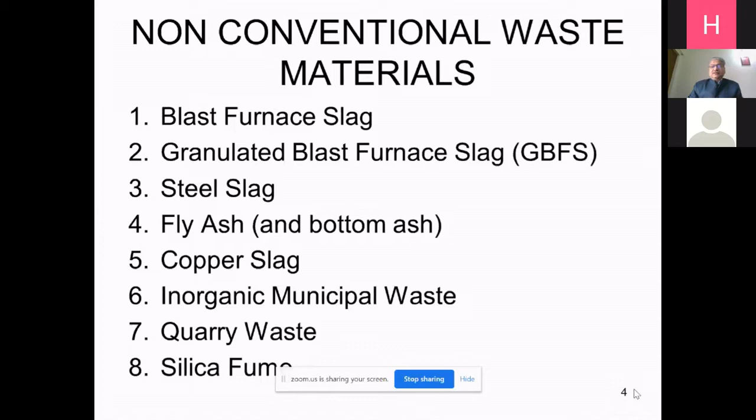Then you have the quarry waste. Quarry waste is the material which, when you blast any quarry, settles in the nearby areas and that can be used in road construction. Silica fume is the material coming out from the glass making industry, and these are basically the silicates.

Then you have the colliery spoil. This is from the coal mines. Red mud - anybody can guess from where red mud is coming? Anybody among the participants can guess? Nobody? Okay, so red mud is coming out from the aluminum industry. When you are making aluminum, the bauxite ore is converted to aluminum, and the waste material comes out. Then bagasse is the waste material.

Again, anybody can guess? I hope your mics are off, so that is why somebody is speaking, he is not able to answer. So if you want to answer, first unmute your mic and then answer.

Anybody has answer to bagasse? Waste material from sugarcane industry. Yeah, it is from sugarcane industry, right answer. So when we take out the juice extract from the sugarcane, the remaining part is burned as the burning material in the boilers, and after that, whatever comes out is basically the ash, which has the property just like fly ash, so it can be used there.

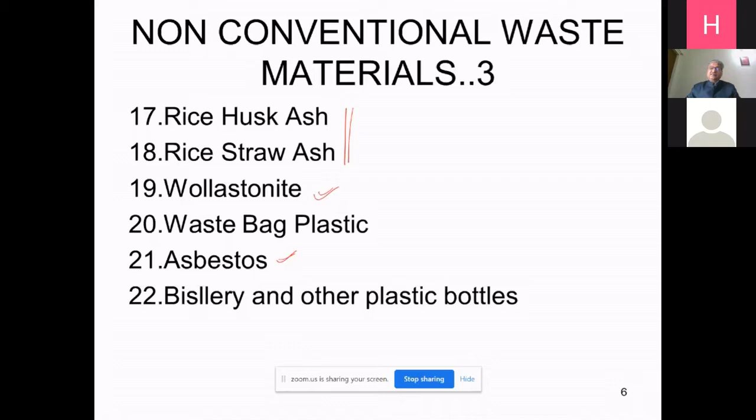Then we have waste bag plastic. With this waste bag plastic, you mix it with the bitumen and modify the bitumen, or sometimes it can be used as reinforcement as the geotextile in the pavement also. Then asbestos is also a material which, after use, becomes useless, and then it can be mixed with bitumen. Similarly, different types of plastic materials like Bisleri bottles or any waste plastic bottles can be used to modify the bitumen.

This is a dump near Rourkela steel plant. Its height can be assessed from the figure. You see here, there is one buffalo standing here, and by the height of the buffalo, you can understand the height of this dump, and how difficult it is to utilize this waste material.

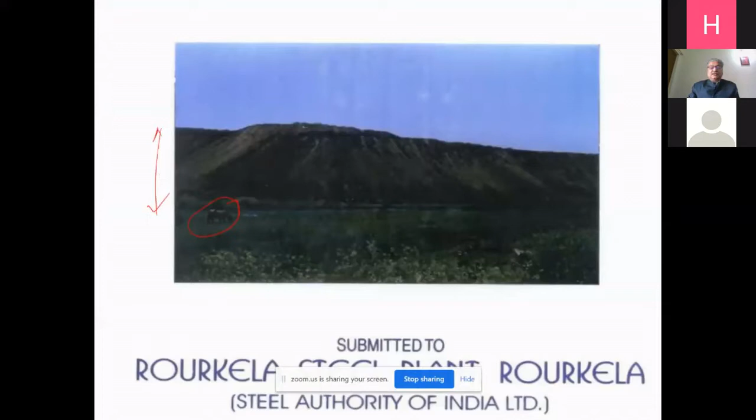Now you can see that there are three waste materials which are coming in the picture. First is the blast furnace slag, air-cooled blast furnace slag. Second is the granulated water-cooled blast furnace slag, and third is the fly ash.

So first I will tell you about the blast furnace slag. It depends upon what method you are using to cool the slag. When slag comes out from the steel plant, its temperature is more than 1000 degrees centigrade, so if you put it in the air, it takes the shape of big rocks.

To cool the rock, there are different methods. First is to let it be in the air as such. So it will take the form of big rocks and boulders that can be crushed, and in that case it will be the blast furnace slag or air-cooled blast furnace slag.

If you put the jet of water over that to cool it, then it will take the structure of small tiny particles like sand, and then it will work as the fine aggregate.

If you put the jet of air over it, then what will happen? It will take the form of expanded slag. Expanded slag is nothing but aggregate which is having very light weight, and due to light weight, it can be used in the filling where the load requirement is not there.

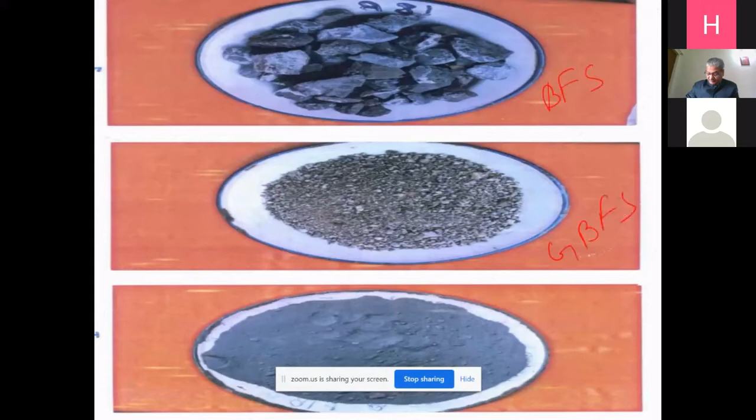Now, after the iron comes out from the blast furnace, it is further refined in the steel making shop. There also waste material comes out, and that is having more strength. This waste material is having more steel. So this is very dense, hard material having lower alumina and silica but high lime.

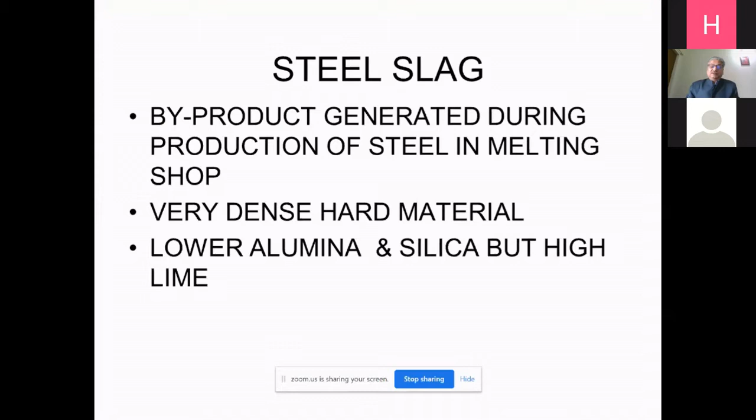Because if you want to use any material in road construction, what you have to do? If a new material comes to you and somebody says you want to use it, what will you do? You will put it on the anvil. You will put it through the test, the traditional tests, and see whether these values are coming within the limits or not.

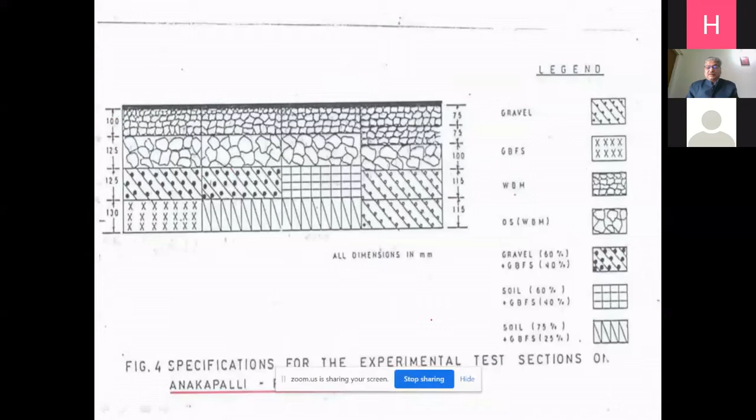You can see that one road was made near Visakhapatnam, the Anakapalli Pudimadaka road. In that road we used 4 specifications. It was basically 1.25 meter widening on both sides, and then putting a new layer of bituminous construction on top.

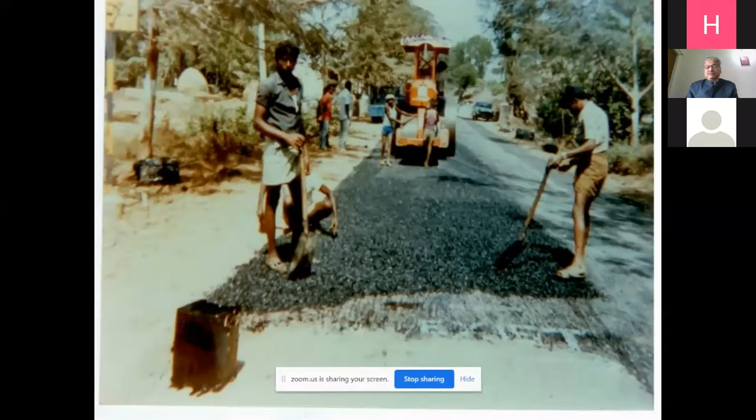After that, we were doing the evaluation of the pavement top surface. At that time more equipment were not available for pavement evaluation, so we used the dumpy level. This is a very old photograph, you may not recognize my photograph. That dumpy level was the only equipment available with us. This is on the Anakapalli Pudimadaka road.

The third work was at Rourkela, the Bandamunda Jalaigala road. In that we used 11 different specifications with steel making slag. You will find that in some specifications there is a full road with the waste material. This is known as the grave laitier technique, a French technique, where every layer is composed of waste material - that's what we were using.

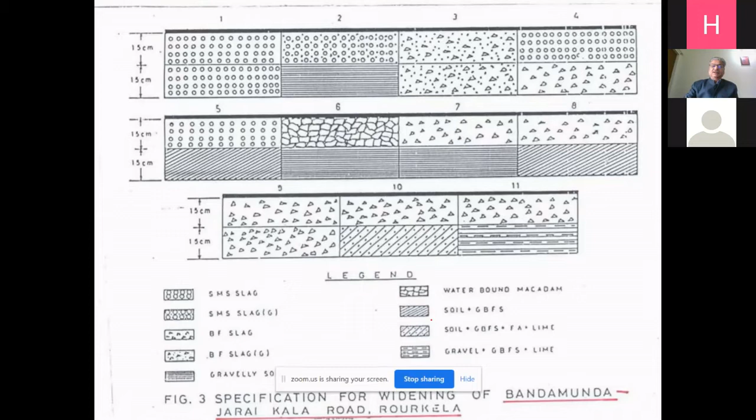Specification number 6 is the conventional specification, so that we can compare this. This road was also monitored for 3 years.

In this photograph you can see I am trying to find out the structural adequacy of the pavement using the Benkelman beam. In the second photograph you will find a dipstick, that is an auto-read road profiler. That equipment had come by the time we started this third project, and instead of the dumpy level, we used this equipment.

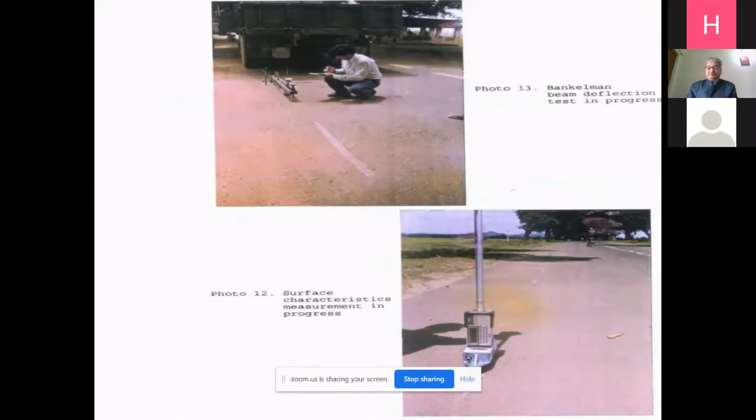You can see a mini computer fitted here, and at the road itself you can find out the rut depth, slope variance, etc. This photograph shows the texture of the road - you can see it is very rough texture, because steel making slag is used in the top layer, which was not crushed even after application of the road roller, because it had a good amount of iron with it. If you remember the table, SMS was having a good amount of...

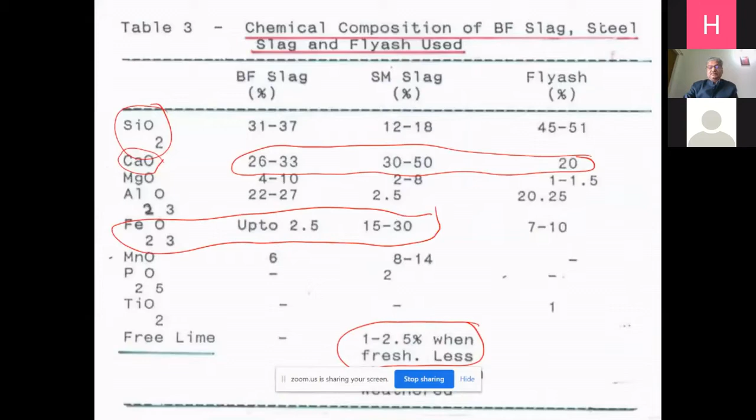We'll see here that Fe2O3, ferric oxide, is 15 to 30% in SMS. So this is the problem, or rather the point also - it is having 15 to 30% iron, and that is why this texture is very rough. The stones are protruding out, coming out, and that is why it was a very strong section.

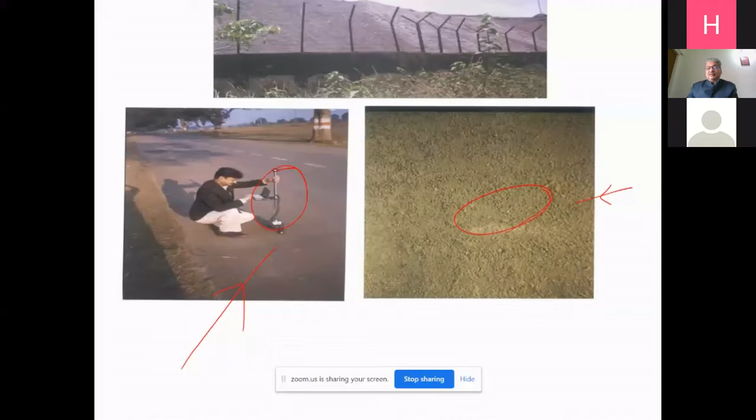The next is fly ash utilization in road embankments. At that time, the parallel bridge of Nizamuddin Bridge, the second bay, was being constructed on the Yamuna River, and at that time it was known as the Indo-Japan Friendship Bridge. For the first time in the country, the embankment was constructed using fly ash - 10,000 trucks of fly ash were utilized in this construction.

As I said, there are many problems with fly ash. That is why research was going on for the last 30 years in the country, but no road was being constructed using fly ash. Why? People used to say that if you put the pages of the research papers written on fly ash one by one on the road, the road length that comes out from those pages is more than the real road construction using fly ash, because it was being done in the lab, but not in the field.

Fly ash has its own problems - it is always put in moist condition, otherwise it flies. Its name is fly ash, so that is why it flies. If it has more water, it flows like water.

So it cannot be transported in air, it cannot be stored without water. Considering this problem, mixing of the fly ash is also difficult. The OMC of fly ash is more than 25%, while the OMC of other soils is around 8 to 12%. So it requires more water, and when it has water you cannot mix it. For mixing, you have to dry it, and if you dry it, it will fly. Considering this problem, nobody was able to put his hand or leg in this controversy - everybody was just writing papers and nobody was making the roads. At that time there was pressure from the Environment Ministry to utilize this material, otherwise it was causing a lot of environmental hazard.

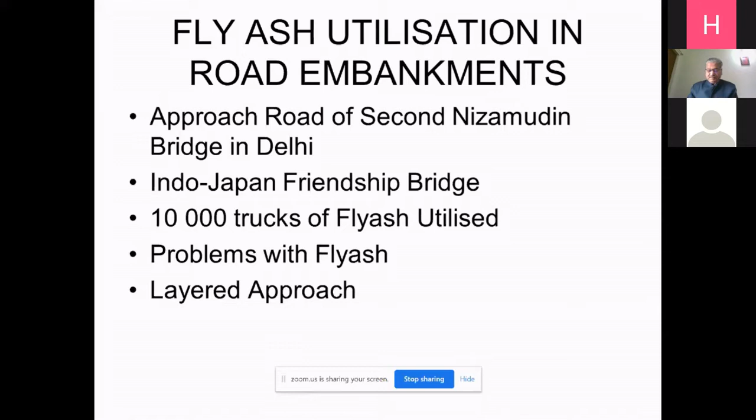1 meter of fly ash, then 30 centimeters of soil, repeated in layers. That way a 9 meter embankment was constructed, and pitching was done from the side. You can see here - this is soil, this is fly ash, and this is stone pitching. From the side, a 1 meter soil cover was provided, and after the 1 meter soil cover, stone pitching was made there.

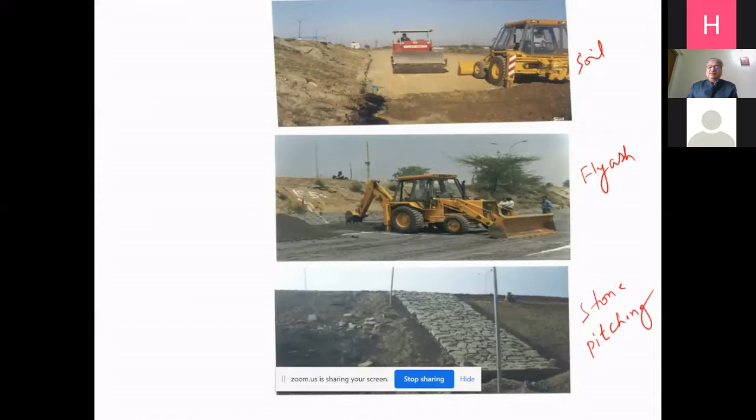Now another thing you can see here - these are plastic boards. This is the project which I did with BPCL, Bharat Petroleum Corporation Limited. This is a photograph from the Bombay refinery of BPCL, on their campus. What they are doing is making plastic boards from waste plastic like this - they compress the plastic and put it in the form of a board. These boards are placed there, and over that we provided 50 millimeters of bituminous concrete. You can see the material was filled up in these boxes. The main purpose was to utilize the plastic.

You can see here the road which was made using this material. Then we tried to find out the structural adequacy using the Benkelman beam. This is a modified form of the Benkelman beam - earlier we were using the open type. This is a simple, in-house type of Benkelman beam in which you can take readings. This project was done around 3 years back, before I went to NIT Delhi as director, and still it is working. Recently, one road has been constructed in Noida using the same technique, and we are going to monitor that road periodically. If it is successful, we will be able to use this technique throughout the country.

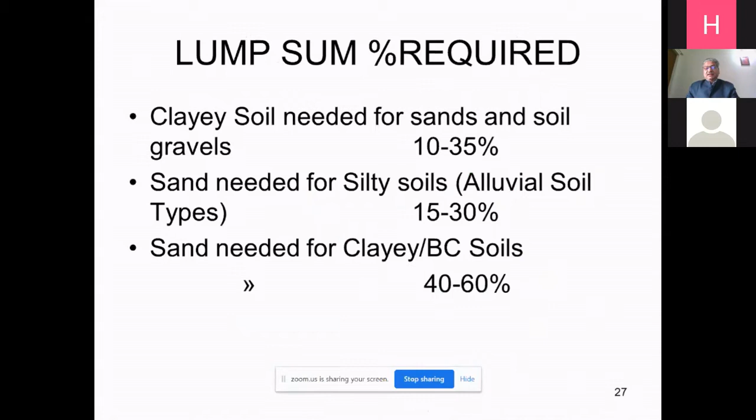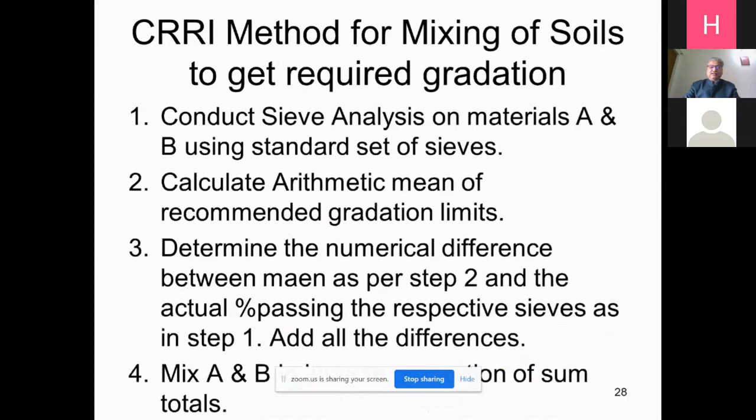Now there is another method for mixing of soil to get the desired gradation, which we have discussed here. The same method we have discussed, for example.

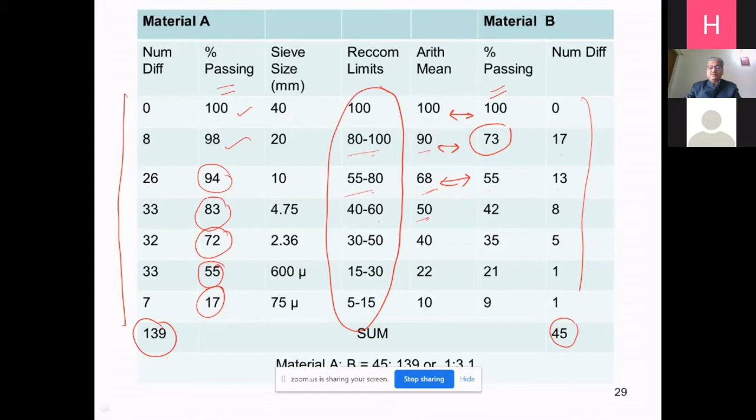Material A and B, these values are with you now. After that, you have to add these materials, and material A and B will be in the reverse ratio of this. A is 139, B is 45. So material A and B are in ratio 45 is to 139, that is 1.3 is to 1, or 1 is to 3.1.

Another method is the Rothfutch method. The Rothfutch method is a worldwide used method, and people use it for any type of material. For example, the CRRI method was only for two materials, while the Rothfutch method can be used for any number of materials.

And Rothfutch was a very creative type of person. What he did was manipulate the x-axis to find out the curve.

Normally, what you do—if you remember, try to recall your memory for class 12th—you were asked to plot a curve between voltage and current. It should come like this, but normally it was not coming.

What did you do? First you draw the curve, and very smartly you put the curve which you are getting. The teacher gave you full marks for that, saying you got a good curve, but actually you hadn't. You manipulated the points. If I am not wrong, everybody has done like this, and the teacher was also knowing this because he also did the same thing when he was in your place.

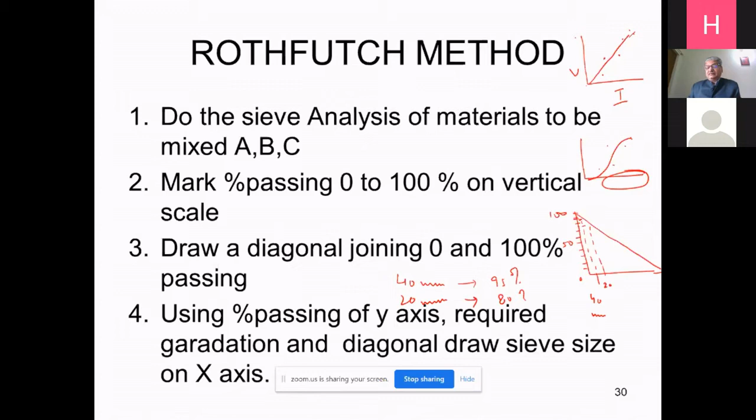Without putting the values on the x-axis earlier, you drew the curve first, and corresponding to the curve and percentage passing of the recommended limits, you are now plotting the x-axis. This is the crux of the method.

You can see here, this is the curve which we have drawn, and these are the values which we have got from there. After that, draw the particle size distribution curve of materials A, B, and C. This is material A, so first you join the points.

After making this joining of the points, what you have to do is you have to draw a straight line representing this curve on the principle of equal and minimum material on both the sides. For example, I could make this line also. Suppose this is A, this is B. Can you tell me which is a better representation, line A or B? Somebody can unmute his mic and tell me which line is the better representation of the curve, line A or line B?

Line A, sir. Why? You are correct, your answer is correct. But can you answer why A is better? Because more or less, it is following the same direction.

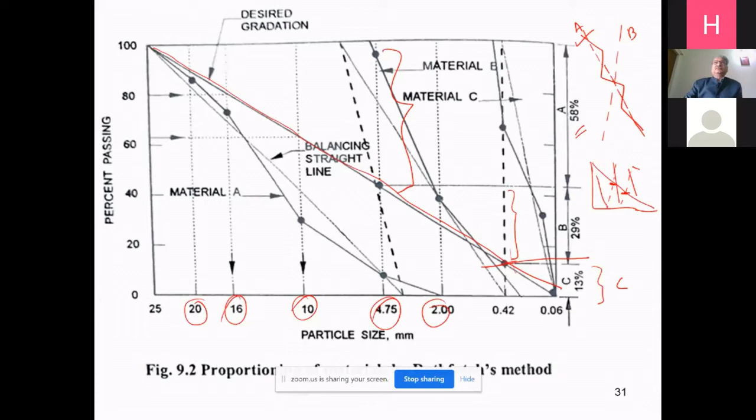This is about this one. Another method is the triangular chart method. Triangular chart method is again for 3 materials only, and in that, for every material you have to find out what is the proportion of coarse aggregate, sand, and silt and clay. So coarse aggregate means 3 centimeter to 2 mm, sand means 2 mm to 0.06 mm, and clay is less than 0.06 mm, on one side each with 0 to 100%.

You will see the figure. This is the coarse aggregate, this is percent sand, and bottom is the clay and silt. So you can see here that A part is marked here. A is basically 85% sand, 5% clay... wait, 85% coarse aggregate, 5% clay, and 10% sand.

Total should be 100%. The key is to be seen for this. This is A. This will tell you about the percent of coarse aggregate, this will tell about sand, and this will tell about clay and silt. So A is showing here like this. This is your coarse aggregate, this part is showing you the sand, and this part is showing you the clay and silt.

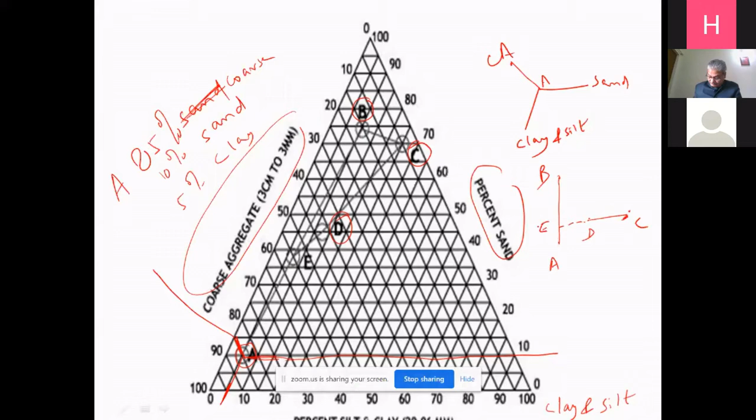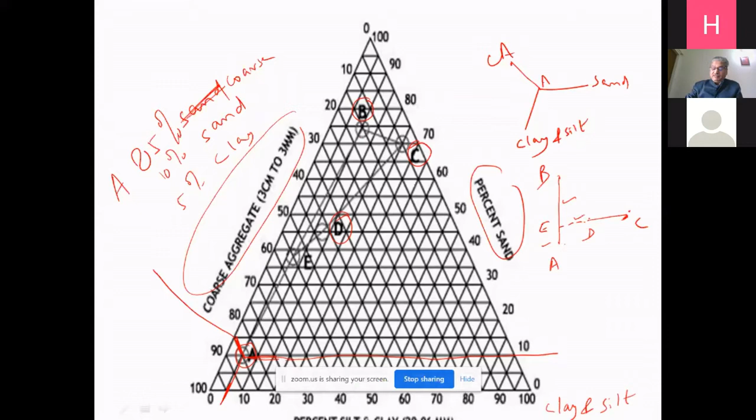Extend this line to join AB at E. Join A and B, join C with the desired gradation D. Extend the line CD to join the line AB at E. Then measure these values EB, EC, CD, and DE. Based on that, you find out the material proportions. Percent of A is equal to EB into DC upon AB into EC, into 100. Percent of B is EA into DC upon AB into EC. And percent of C is ED upon EC. So this is the method.

Now, many times this question is asked - in every method, we are saying the desired gradation.

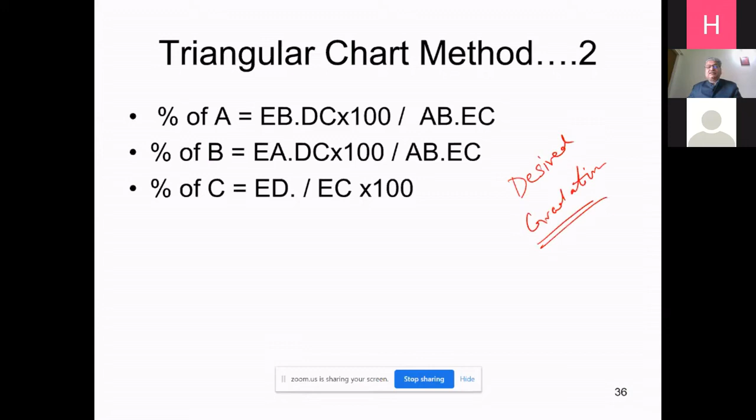From where is this desired gradation coming? For that, Fuller's method is there. It says P, the desired gradation, is equal to 100 into D by Capital D to the power N, where P is the percent finer than diameter D in the mix, Capital D is the diameter of the largest particle in mm, and N is the gradation index.

Let us take one example where we have a material in which the maximum size is 40. So this becomes our Capital D. I want to know what material passing 20 mm should be there, and N may be taken as 0.5. So P equals 100 times 20 upon 40 to the power 0.5, that is 100 into 1 by 2, so this comes out to be 71%.

Similarly, if I do for 10 mm, then 100 into 10 by 40 to the power 0.5 comes out to be 50%. So this is the method to find out the gradations of all types of mixes prevailing in the country or the world. Rothfutch method is also based on the desired gradation, which is taken from the Fuller's method. This question may be in your minds, in your books, codes etc. Everybody writes that this is the desired gradation, then anybody can ask who gives you the desired gradation. So the desired gradation comes from here.

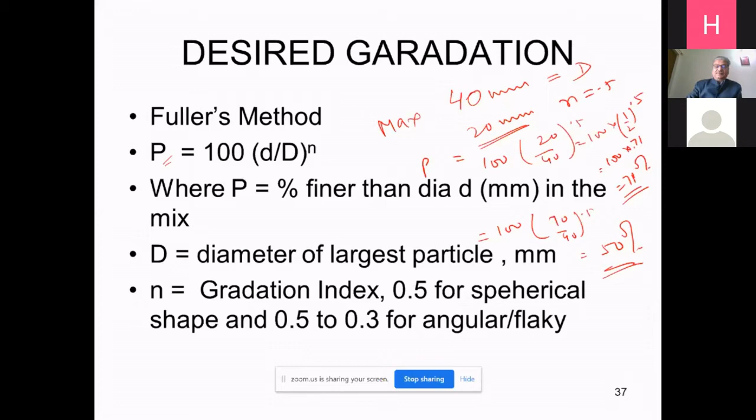Now, stabilization using soft aggregates. Many times you will find materials which are very soft and cannot be used as such. But since these are available and you want to use them, you have to understand the scenario of using the aggregates. For example, there is the condition of coarse compacted aggregates with no fines, compacted aggregates with fines just filling the voids, and third, aggregates with excess fines in which the aggregates are floating in the soil. Depending upon the condition, normally for rural roads or where load is less, you can go for this, avoiding direct loading on the aggregate by putting them in excessive soils.

With no fines, it is highly permeable. When fines just fill the voids, it is less permeable. When excessive fines are there, it is poorly permeable. Permeability is there when you have sand or coarse aggregate. When there is clay, the permeability is less, and the drainage is also less.

But when there are no fines, the cohesion is very less. It is difficult to put the material when it is not confined, because the material will come out from the sides. For example, if you put sand in the shoulders, since there is no confinement and no cohesion, the sand of the shoulders will come out, it will go towards the pavement edge, and your shoulders will be disturbed. But when there is clay in the shoulder, it will remain there. At the same time, when clay is too much, swelling will occur and the strength will be less. So you have to see the combination of different things so that your material passes through that.

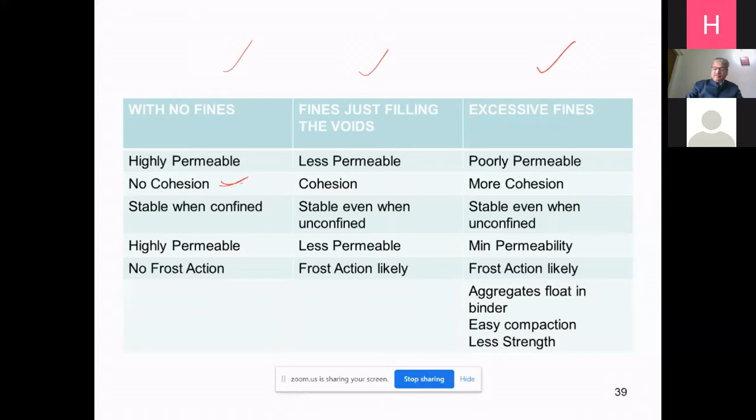Now, depending upon these three material conditions, we are interested because these two conditions are already understood, you know how to make the road. But when excessive fines are there, this is a method different from the others. For that, Mehra's method of construction using soft aggregate is there.

S.R. Mehra was the first Indian director of CRRI. He was the professor at IIT Roorkee, which was at that time University of Roorkee, or maybe College of Engineering Roorkee. S.R. Mehra was the first Indian director — of course I say Indian director because the first director of CRRI was Mr. Zipkes, who was British. Then in 1950, when an Indian director was there, it was Mr. S.R. Mehra.

So in this method, what they say is you have to use, in the base course, soil with 50% soil of PI 5 to 7, because this 5 to 7 means it is having clayiness also. Over that, you have to put the wearing course of brick and soil ratio 1:2, and its PI should be 8 to 10. So first the layer of base course is soil, then brick plus soil.

Soil is collected from approved borrow pits and stacked on the roadside. Water is added up to OMC and the soil is mixed and spread to the desired camber and rolled by an 8-ton power roller.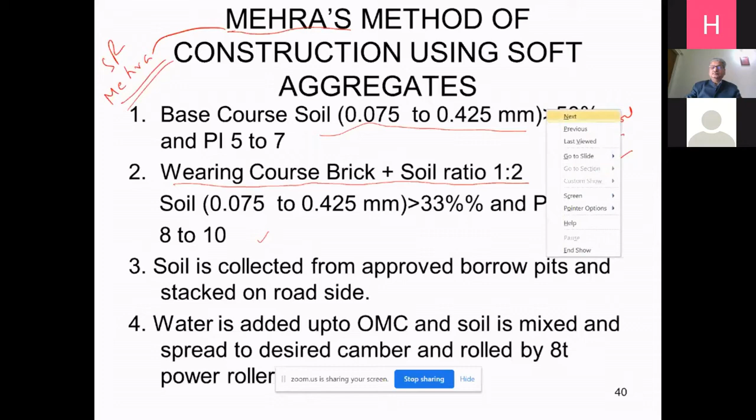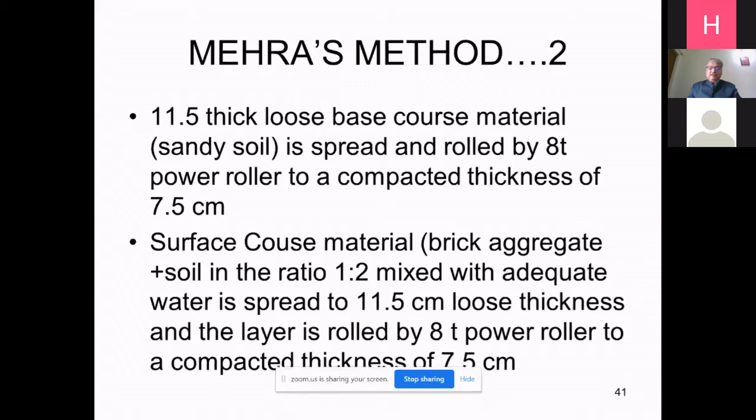The loose thickness is 11.5 centimeters, which is rolled and compacted to a thickness of 7.5 centimeters for the base course. Similarly, for the surface course also, it has 11.5 centimeter loose thickness and it is rolled by an 8-ton power roller to a compacted thickness of 7.5 centimeters.

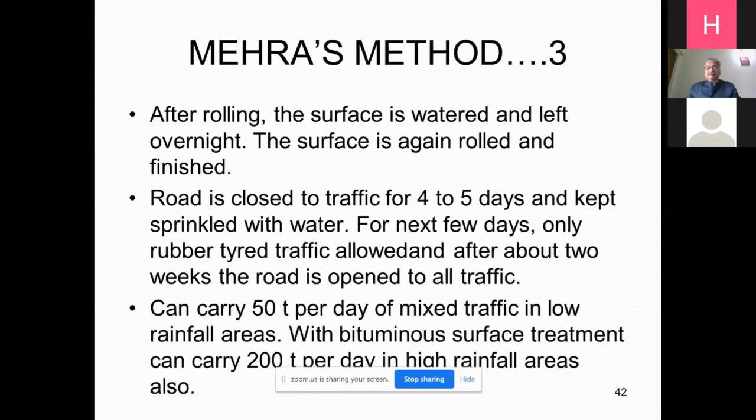After rolling, the surface is watered and left overnight. The surface is again rolled and finished. So the road is closed to traffic for 4 to 5 days, and it can carry 50 tons per day of mixed traffic.

Now, if you find that by the mechanical stabilization you are not able to yes, hello,

If you are not able to achieve the desired results by mechanical stabilization, then you go for chemical stabilization. Chemical stabilization means adding some chemical. When mechanical stabilization is not sufficient, you go for chemical stabilization, and in this the first is lime stabilization.

It is adopted for silty clays and clay soils when PI is more than 10. But you must maintain that the calcium hydroxide content in the lime should be 70% or more. If it is inferior, then you have to increase the quantity of lime.

Here are the lump sum requirements of lime: for alluvial soils and moorums, it is 2 to 3%. For clays and BC soils, it is 3 to 5%. For expansive BC soil, it is 5 to 6%.

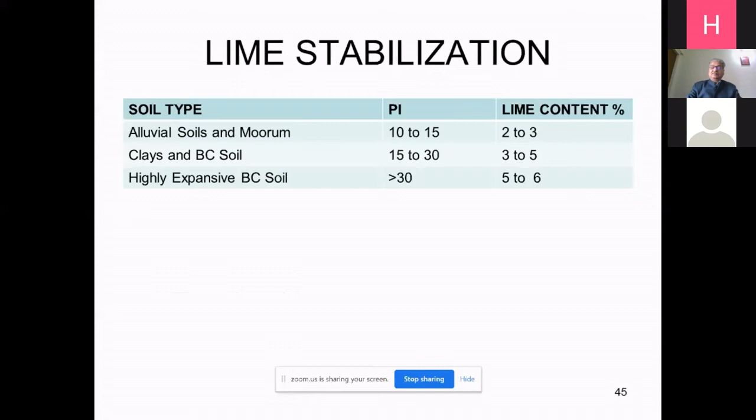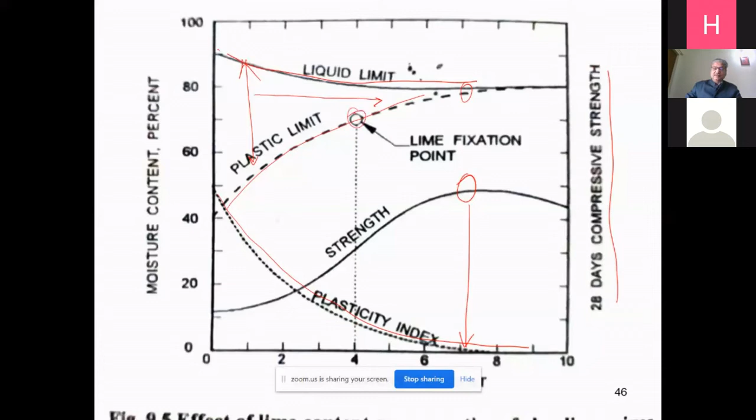Normally, we go for 4 to 6 PI. That is why you see here that this is the lime fixation point, and around 4% lime is sufficient for all types of soils.

If you are not able to achieve the results by simply putting the lime, you can go for lime fly ash soil stabilization. Fly ash is a pozzolanic material, and in this 6 to 12% fly ash can be used, and it increases the reactivity of the lime.

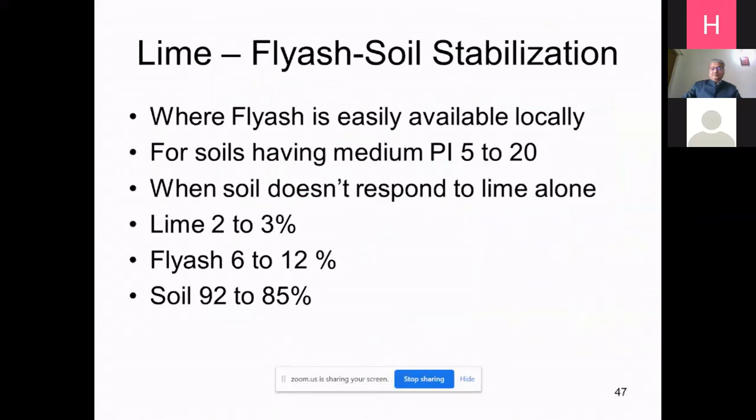Then you have cement stabilization. If you are not able to get the result from lime fly ash also, then you can go for cement stabilization. Cement is 3 to 4 times more costly than lime, but when higher and faster development of strength is needed, then you go for this, especially in high waterlogged areas or high rainfall areas.

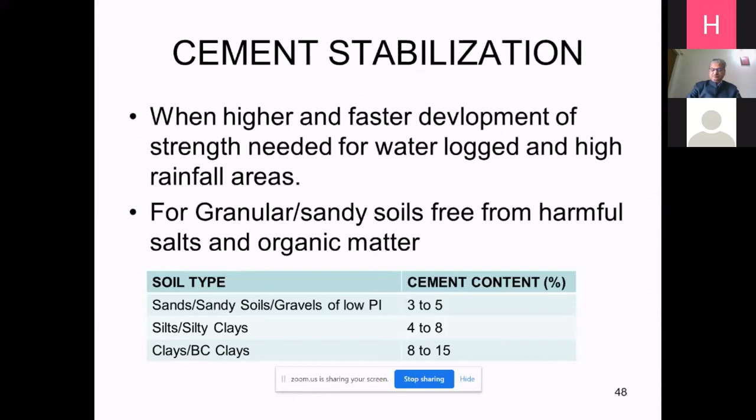If you want to use lump sum values, these are given here. Otherwise, you can go for the method. There are two methods: one is the British design method for cement soil stabilization.

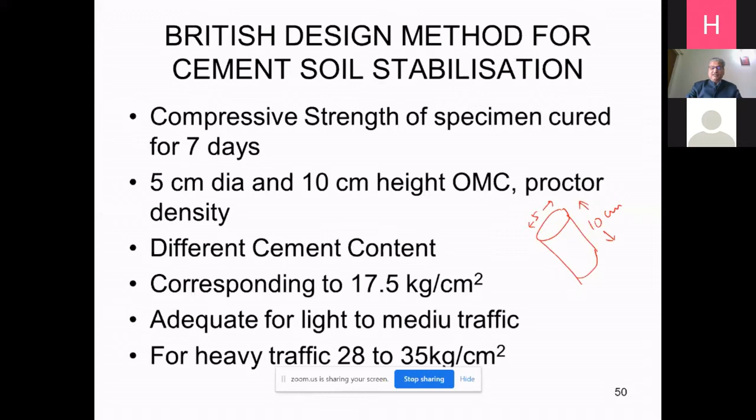You have to make samples like this, 10 centimeter height and 5 centimeter diameter. Different cement contents are taken, and then you have to find out the compressive strength, and the value corresponding to 17.5 kg per centimeter square is basically the required value.

In the second method, again that is the Portland Cement Association method. In this also the same 10 centimeter height, 5 centimeter diameter samples are made with different cement content, and there are 12 cycles of wet, dry, or freeze-thaw test cycles.

In this, after each cycle, you put the sample in water, take it out, dry it, and then brush it with an iron brush, and again put it in water. That way 12 cycles are made, and you find out what is the loss in weight after 12 cycles.

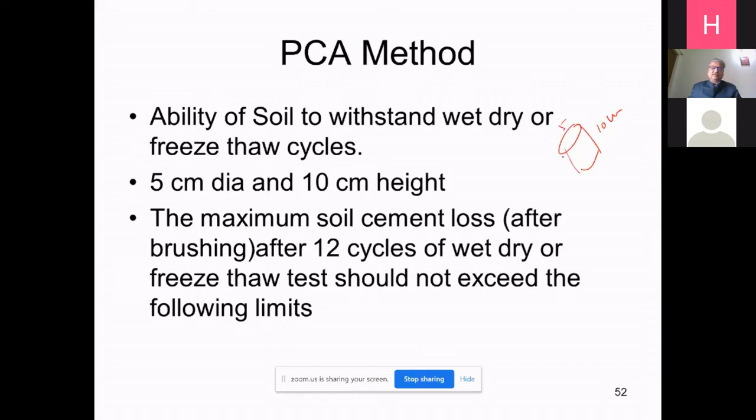So the maximum abrasion loss percentage by weight is to be found, and in that case the soil type classification is given for A1, A3, A24, A25. It should not be more than 14%, and like that.

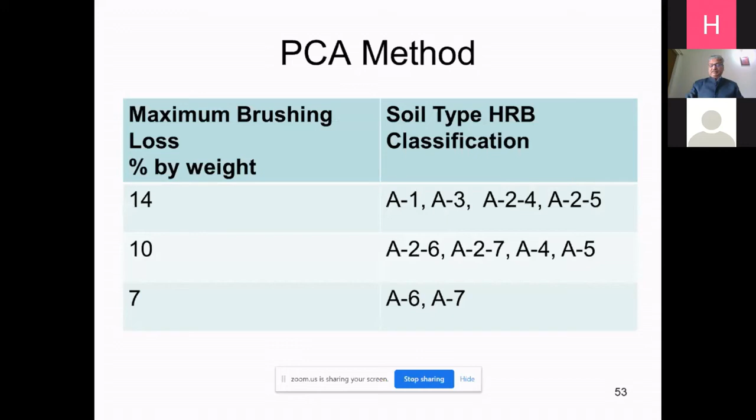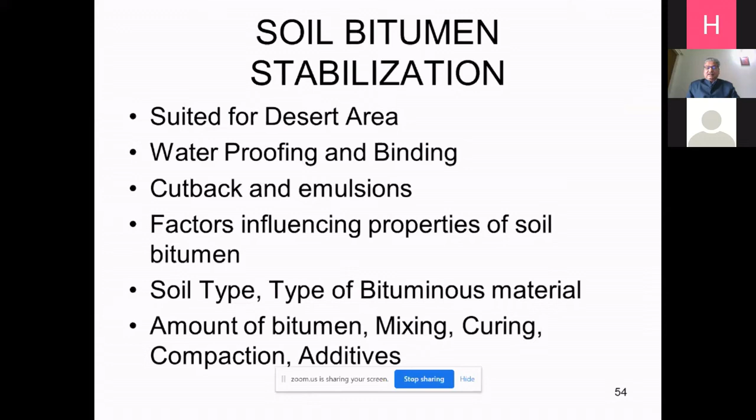Next is soil-bitumen stabilization, which means you add bitumen to the soil. This is suited for desert areas, for waterproofing and binding, using cutback and emulsions. Factors influencing properties of soil bitumen are soil type, and it is mainly suited for desert soil. The amount of bitumen is also important. If you add more bitumen, you can see how these properties change.

As you increase the bitumen content, the stability first increases up to a certain point, but then starts decreasing. That is why bitumen content is important. You cannot go on increasing it infinitely, because bitumen itself is weak in stability, but its role is to provide waterproofing and the cohesion or adhesion between the aggregate and the bitumen. So up to a certain point it increases, then it starts decreasing. Similarly, the maximum dry density also decreases, because the specific gravity of bitumen is about 1, 1.02 or 0.97.

While the desert sand has a specific gravity of about 1.7 or 1.8. So when you add the bitumen, the combined dry density starts coming down.

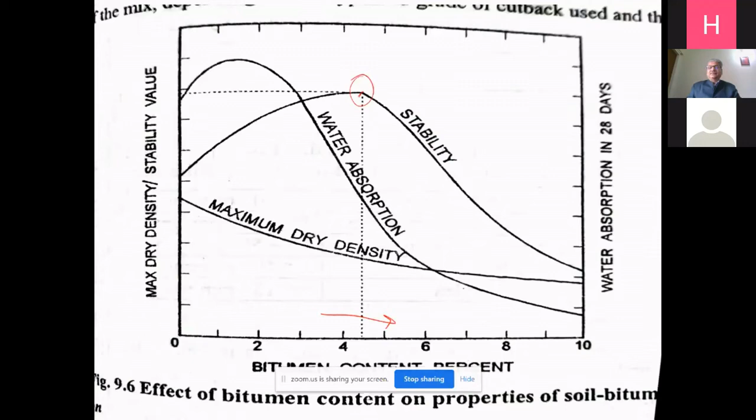Now, some special treatment in waterlogged areas: you add 3 to 4% lime, and a sand blanket is used for capillary cutoff to check moisture movement. The thickness of the sand blanket in centimeters is given by 8 divided by d to the power 0.92, where d is 2*d1*d2 upon (d1+d2). Basically this is the harmonic mean of d1 and d2, and you can find it out.

Or a third method may be used: a primer coat comprising 50% high speed diesel oil and 50% bitumen is applied on both sides of the trench.

Then in water bound macadam, these are the requirements. Nowadays people are discarding water bound macadam, saying it is not a good material, though we have a history of using WBM in the base and sub-base for more than 100 years. WBM was in use, but nowadays it is replaced by GSB for sub-base and WMM for base, because people say these materials are better, and in WBM the contractor puts more soil.

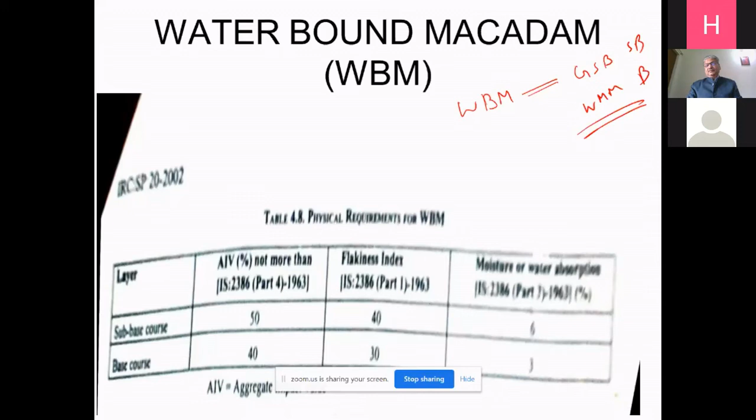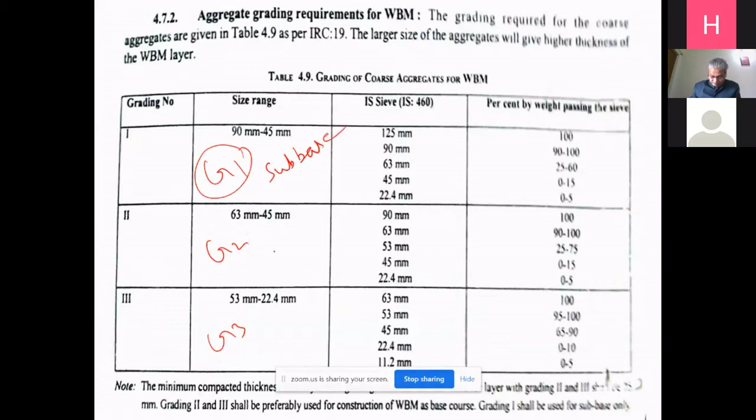G1 is used for sub-base. This one is used for base, and this is also used for base. Its thickness is 100 mm, 75 mm, and also 75 mm. So you have to use this material, and its CBR is assumed to be 100%.

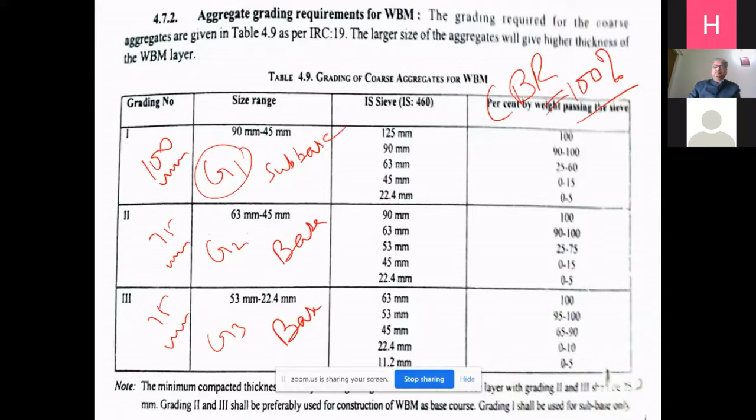So as I said, you have to follow the steps given in the codes, in the manuals, in the books - then there will be no problem. First of all, prepare the foundation. If it is a sub-base, then the foundation will be the subgrade. Suppose this is the road.

Then preparation of the foundation: the camber is to be provided in the subgrade itself. Please remember, camber is not to be provided on the top layer - it should not start from the top layer, it should start from the bottom layer itself. So the first part is preparation of foundation.

Then lateral confinement, which means shoulders are to be made first. Then spreading of coarse aggregate.

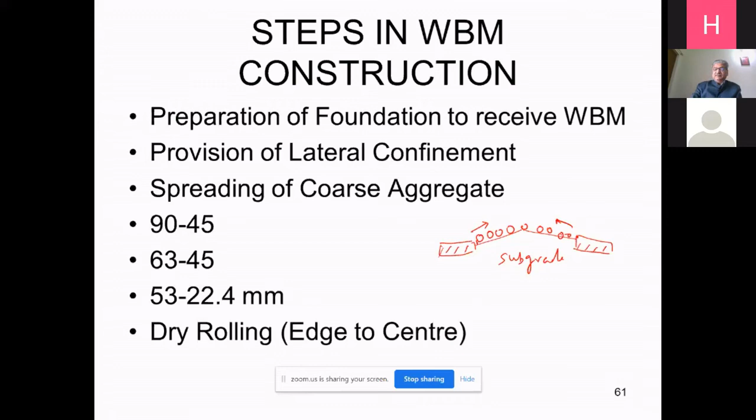Then dry rolling from edge to center. Rolling is always to be done from the sides to the center, not from center to the side. If you roll from center to the side, the camber will vanish and will not be there. So always start rolling from the sides toward the center. Then application of screening, as I said.

These are the screening, sprinkling and grouting with water. Then application of binding material. What is binding material?

This has been my pet question in UPSC. I made the paper for 3 years, and every year I put this question: what is the binding material in WBM? Two questions from this chapter I included there. One was, what is the binding material in WBM? Who can tell?

Stone dust, sir. Any type of material having PI 4 to 6. Stone dust or even normal soil also can be used. Stone dust is not having PI of this category 4 to 6, so normal soil is the best thing.

So many answers come for this question. Somebody says binding bitumen, somebody says cement, somebody says something else. But the correct answer is soil having PI 4 to 6, though sometimes people answer sand. Sand cannot be used. Earlier the specification said PI should be less than 6, so sand was possible to be included. That is why, to make it impossible to include sand, it was made 4 to 6.

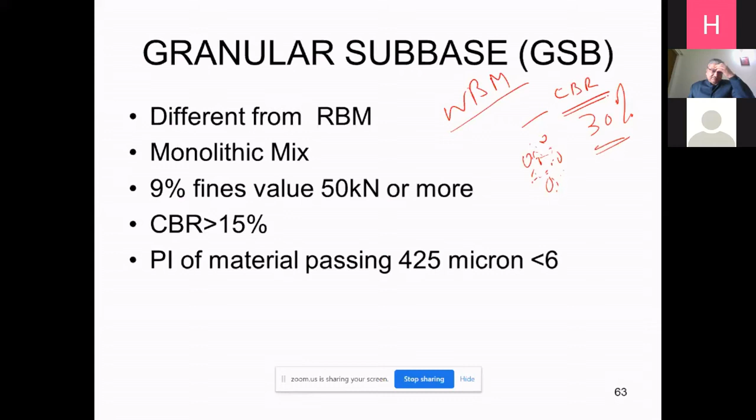So this is about that. Now we come to jute textiles and road embankments, and where these are needed. Normally we say biodegradation should not be there, but in case of jute, it is there. So we use jute and coir at places where initial reinforcement is required. After some time in the embankment, grass starts coming, providing reinforcement. So by the time grass is grown, the jute or coir vanishes, and that is why you can use it.

We have the geosynthetic family like geogrids, geomembrane, geonets, geocomposite, geotextile - natural and synthetic. Natural geotextiles include jute, coir, paper strips, wood shavings, all biodegradable. But as I said, by the time they degrade, the grass comes out, and their strength-providing function is taken over by the grass. These are naturally occurring materials, so they don't create any problem to the ecology. Natural geotextiles may also come from animals or from plants.

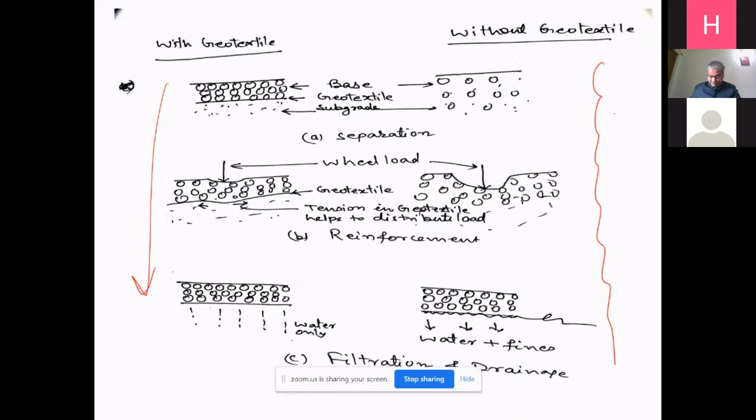The functions of geotextile are four: separation, reinforcement, filtration and drainage. Here, this side is with geotextile, this side is without. If geotextile is there, separation occurs, so this material is not mixed with the subgrade and it does not lose strength. It acts as reinforcement, so the effect of load is less compared to without geotextile. Filtration and drainage are also present in the case of geotextile, while without geotextile it is not there.

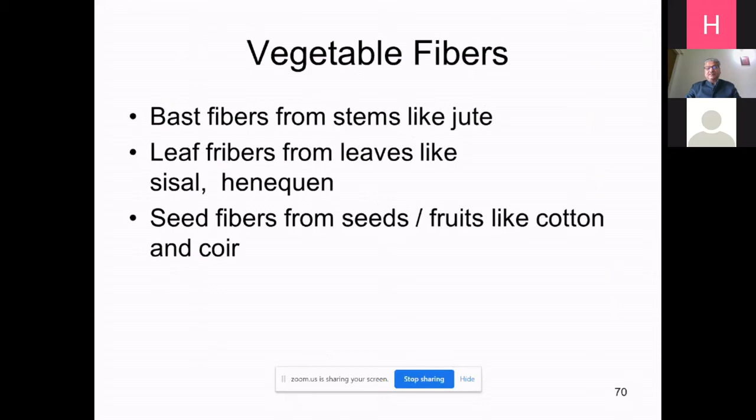Vegetable fibers may be of different types, like bast fibers from stems such as jute, leaf fibers like sisal and henequen, and seed fibers like cotton and coir.

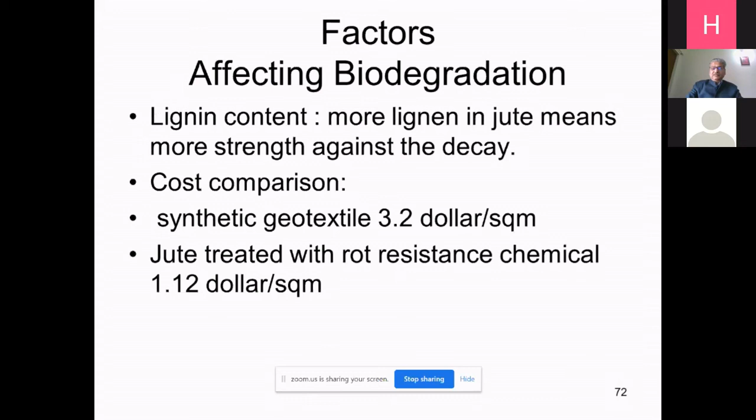If lignin content is more, then it has more strength.

Jute is to be treated with phenol. Phenol is nothing but the phenyl you use in houses for cleaning the floor. The degradation of jute is due to the development of bacteria, so to remove the bacteria we treat it with phenol. But if excess phenol is used, then due to its chemical reaction, jute may degrade. So we have to balance between the minimum and maximum doses of phenol.

This comes out to be a 5% phenol solution used for 6 hours, which gives the optimum result. With this, the K value, that is the modulus of subgrade reaction, increases by 60%. Using jute in place of synthetic geotextile, an economy of about 65% can be achieved.

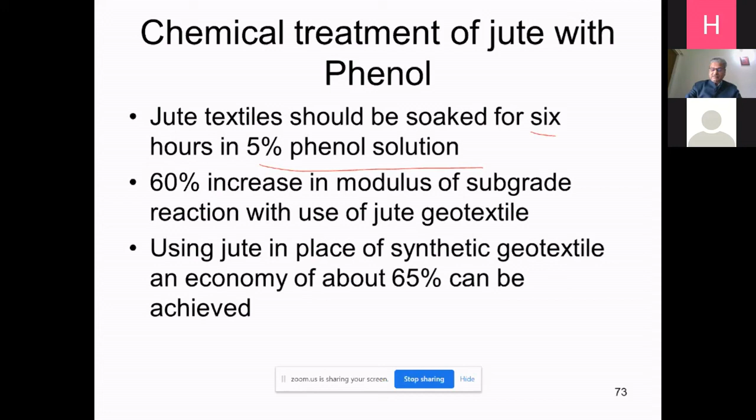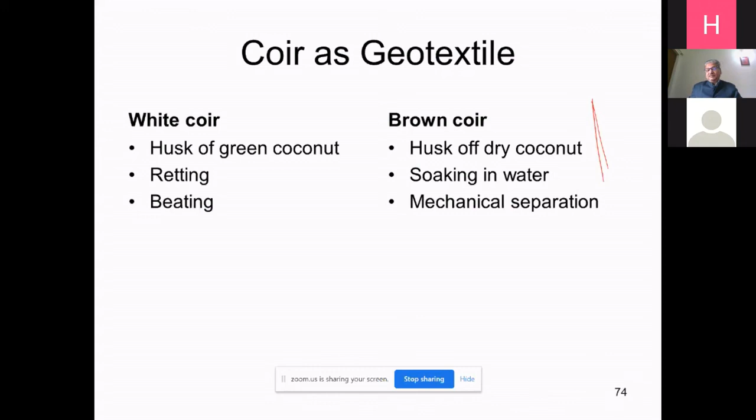Coir is available in all coastal regions and can be taken out from dry coconut as well as green coconut. White coir means when the green coconut is there, you take it out, do retting and beating to make white coir, while brown coir is from the weathered coconut, and then we do mechanical separation for coir.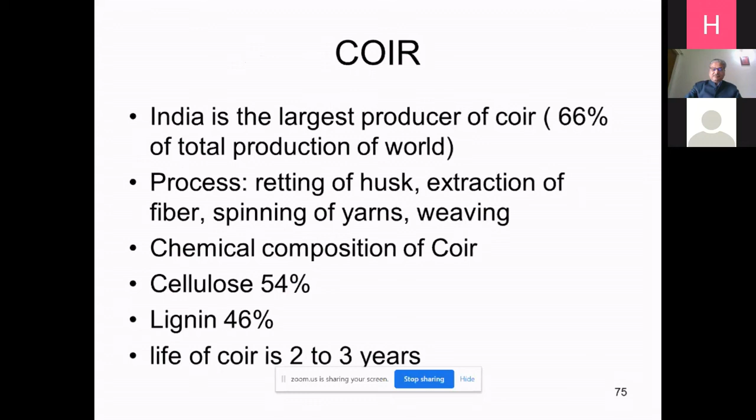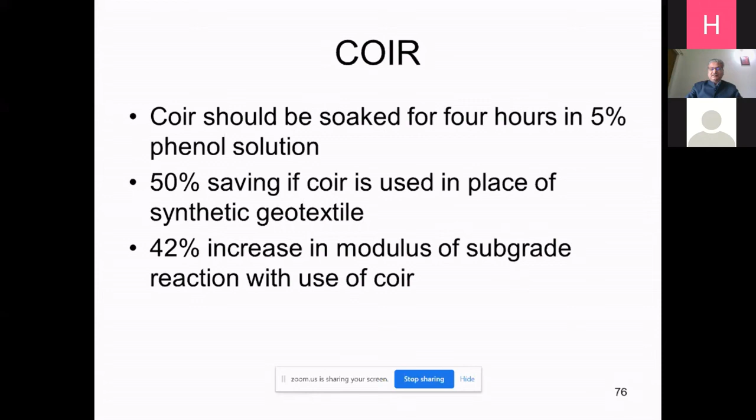The chemical composition of coir is 54% cellulose and 46% lignin. It should be soaked for 4 hours in 5% phenol solution, and 50% saving of cost is there if coir is used in place of synthetic geotextile.

Now, a little bit about bitumen. Bitumen mainly has two components: maltenes and asphaltenes. Maltenes are non-polar and asphaltenes are polar.

Bitumen is used in the construction of roads in the top layer because we want a material that behaves differently at different temperatures. When we mix it with aggregate, it should behave as a liquid so it can coat the aggregate. When we compact it, we want it to act as a semi-solid so compaction can occur. But once the road is constructed, we want it to behave as a solid so vehicles can move over it and it has the same strength as the aggregate. For that purpose, bitumen is the ideal material for road construction.

Earlier, tar was used, but nowadays tar is not coming. Earlier tar came from coal, but since the use of coal is now limited, coal tar is also not available. Now we use bitumen instead.

But at the same time, drawbacks are also there for bitumen. First is the oxidation effect - just like a human being, aging also takes place for bitumen, starting from when it is mixed with aggregate: short-term aging, then long-term aging. Sometimes it has affinity towards water, so it leaves the aggregate and goes towards the water. Cost is high, around 50 rupees per kg.

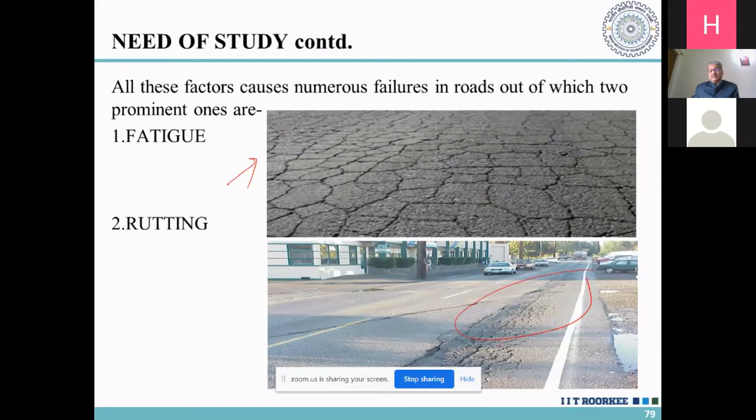So you can see here, mainly there are two things. One is the fatigue case, this is at low temperature because of the movement of vehicles. It is also known as crocodile cracking, map cracking, or alligator cracking. And this is basically the rutting of the pavement. Rutting is taking place along the wheel path, the pavement is going down.

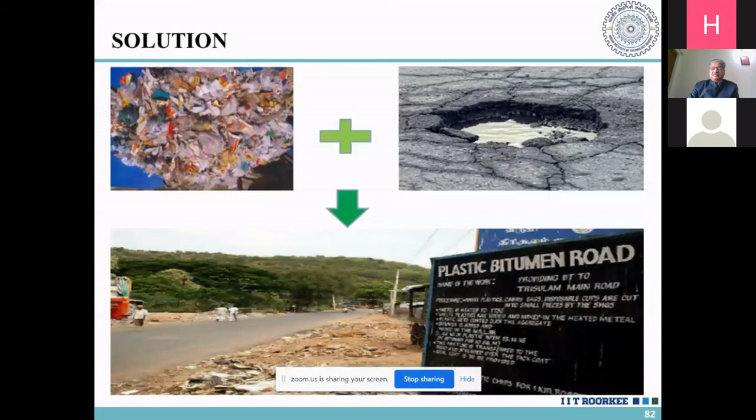These are different types of waste available in the country, and these are creating environmental hazards. It is our plastic and it is our problem, so we have to use this material also. One plastic bitumen road was made using this material, you can see here.

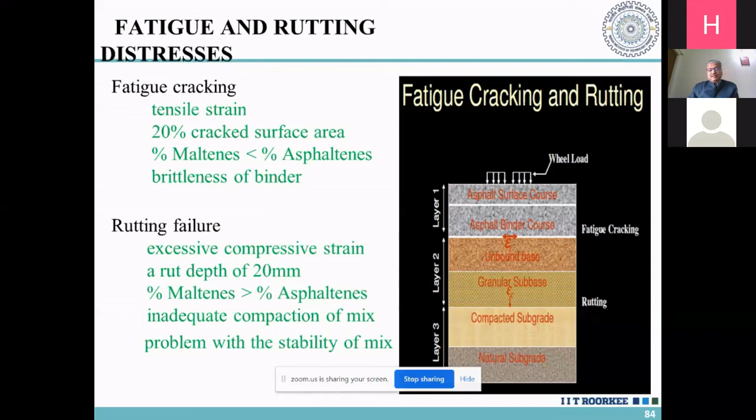The road is put on the anvil based on two things: excessive fatigue should not be there, and excessive rutting should not be there. When it is fatigue cracking, tensile strain is more, 20% cracked surface area is there, and asphaltenes are more than maltenes, then it takes place. It is the brittleness of the binder. But when maltenes are more than asphaltenes, then rutting can take place along the wheel path.

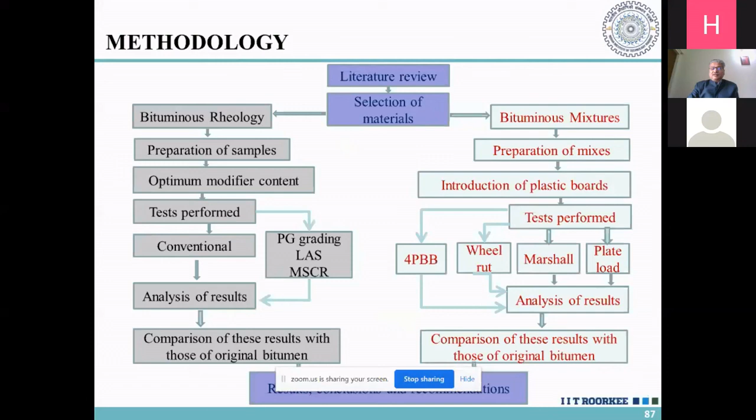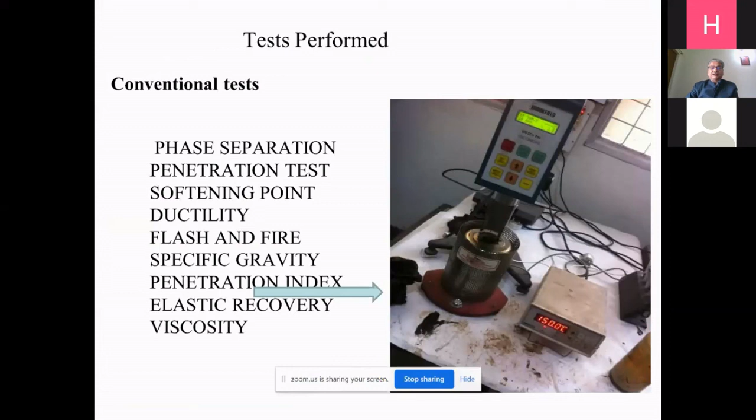These are the conventional tests which we did: phase separation, penetration test, softening point, ductility, flash and fire, specific gravity, penetration index, etc. And these are the rheological tests.

Rheological tests are new in the country now. Worldwide, people are not using penetration tests or softening tests anymore, because these are indirect measures of viscosity. In the penetration test, we measure penetration in 1/10 of mm, which is not viscosity measured in poise. Similarly, in the softening point test, we measure the temperature at which the ball touches the lower plate, which is in degree centigrade, not viscosity. Thirdly, in ductility test we find the length at which the thread breaks, which is in centimeters, not poise.

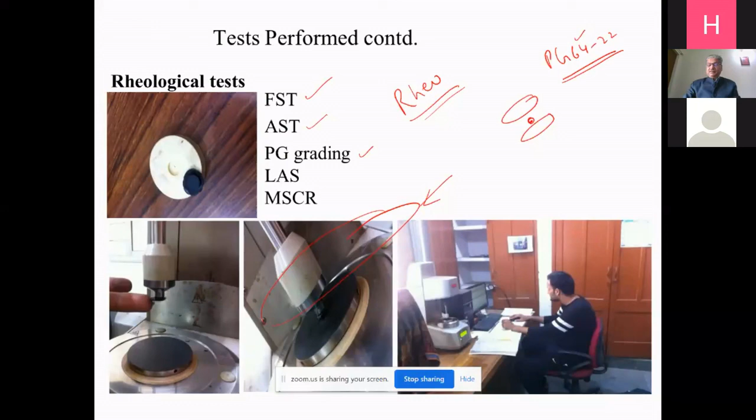So this is frequency sweep test, amplitude sweep test, PG grading. Nowadays PG grading is coming out, like if I say PG 64 minus 22, this means your bitumen can work up to 64 degrees centigrade on the higher side and minus 22 degrees centigrade on the lower side. In our country, we are still using VG, viscosity grade bitumen. VG 30 means viscosity related to that, while earlier we were having the penetration grade. Now we are switching over to PG grading also, worldwide. These are the different tests shown here.

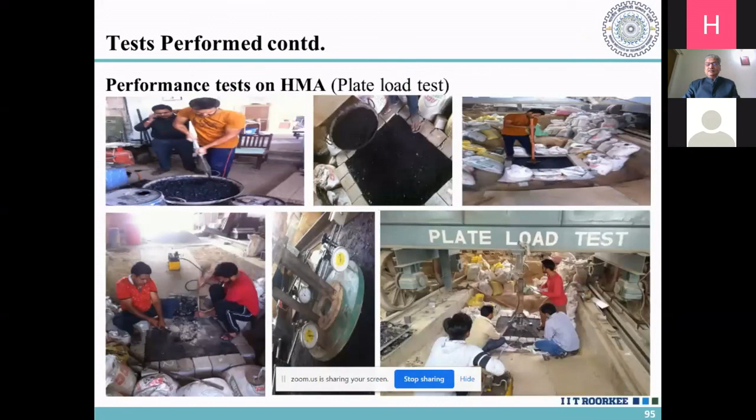We did the plate load test also, and this is the plate load test. We also tried to find out the phase separation test, in which we put the material in a test tube, then cut it into 3 parts and find the softening point of the top layer and the bottom part. Their difference should not be more than 3 degrees centigrade; if it is more than that, it is not useful.

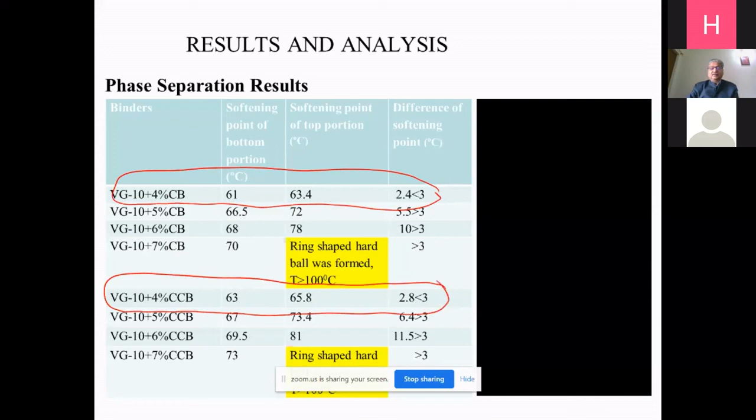So this is useful, similarly here also cement carry bag. Otherwise the phase separation is there, so it cannot be used. You see here, these are the properties of modified bitumen.

So your PG grading will be PG 70. For VG plus 4% CCB, this has become 82. What is the meaning of this? By adding 4% cement bag, or the carry bag, the PG grading has changed from 70 to 82, that is it can work now up to 82 degrees centigrade.

Similarly, for cement carry bag, it is increasing up to 100 degrees centigrade, so up to that it is useful. So this is telling you about the different materials, how we are using them.

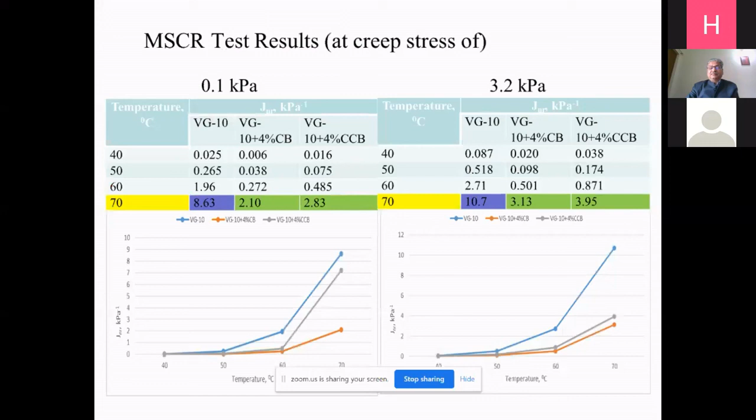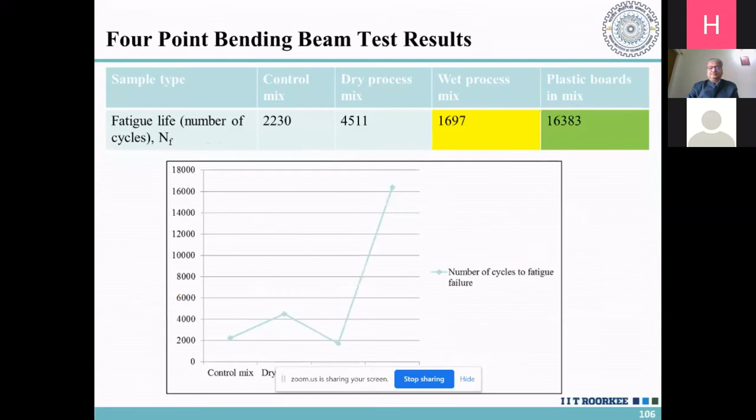Then the MSCR test, it is also a test regarding the rutting. It also tells you the improvement when we are using 4% cement bag or cement carry bag. This is the LAS test, that is the linear amplitude sweep test, which tells about the fatigue. This is the 4-point bending beam test result, also about the fatigue.

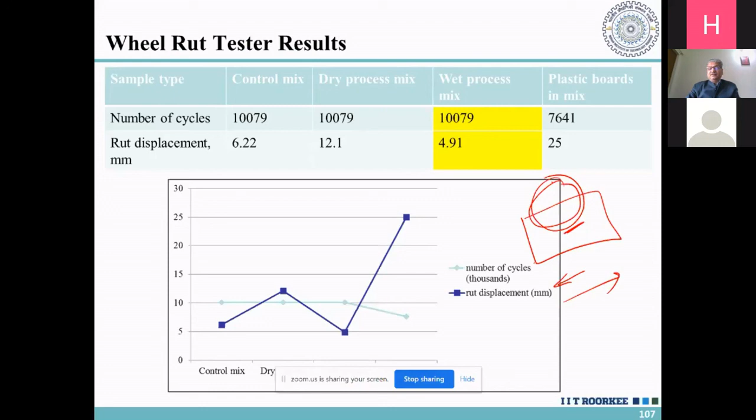And the wheel rut tester is the condition when we simulate the rutting conditions in the lab. It is the wheel which passes to and fro over the sample, and after 1000 passes, after 2000 passes, after 1 lakh passes, we try to find out what is the rut depth, and it should be less than 25 mm of the sample.

So this is all about what I wanted to show you. I have tried to minimize the time because I have not included much about bitumen. I have seen my students are giving lectures on bitumen more, so I try to concentrate more on the non-bituminous part in my lecture.

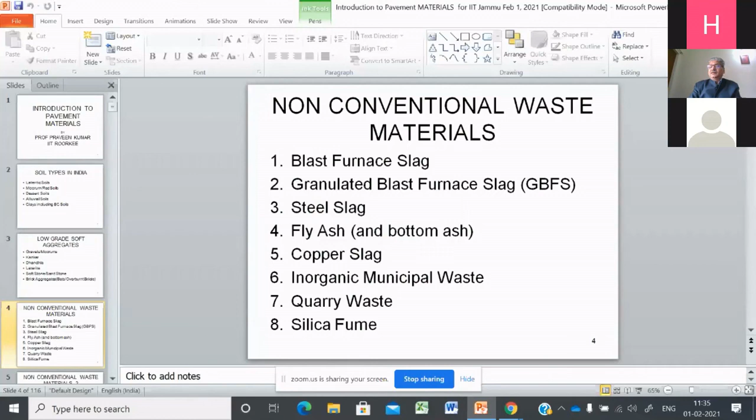So Nikhil, Maninder and Bhupen, they all will be covering more on the bituminous part, so that will be useful to you. Whatever I have covered, if you have any question, you can ask.

Sir, there are a couple of questions in the chat box, if you allow, can I read them one by one? Yeah sure. So the first question is by Mr. Kshitij. He's asking what could be the long-term effect of chemical stabilization in soil?

Long-term effect, actually that is why we have not gone beyond 4%. If you are going more than 4%, then the permeability will be reduced. By using any type of chemical stabilization, you are reducing the permeability, you are reducing the drainage. So that is why we don't go more than 4%. Suppose you go for 8% or 10% of cement, then the strength will be definitely more, but in that case the pores will be choked up and your soil may become poor.

Right sir, thank you. Is there any difference in the lifespan of flexible pavement if we mix waste like plastic or others as compared to conventional mixes? Because plastic can be used two ways, one is as the geotextile in the soil, so there is no effect because these are inert materials. In case of the top layer, the strength is also increased as well as we are reducing the rutting and fatigue, so that is why the life will increase.